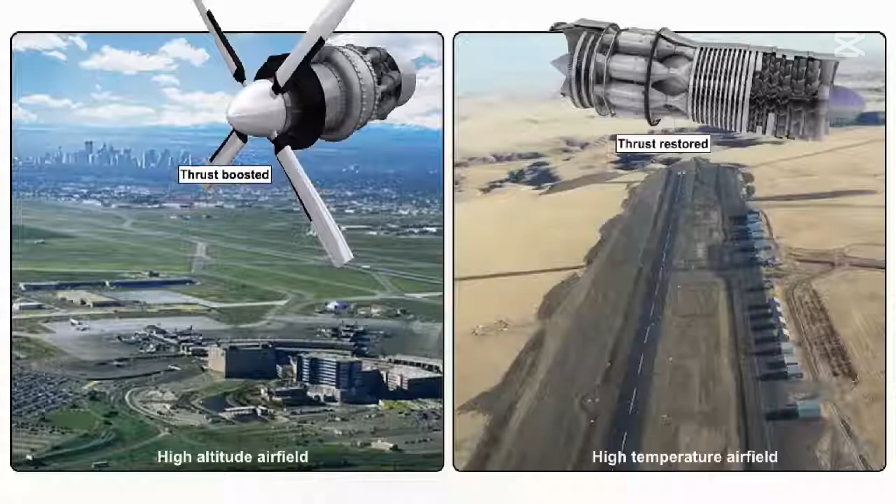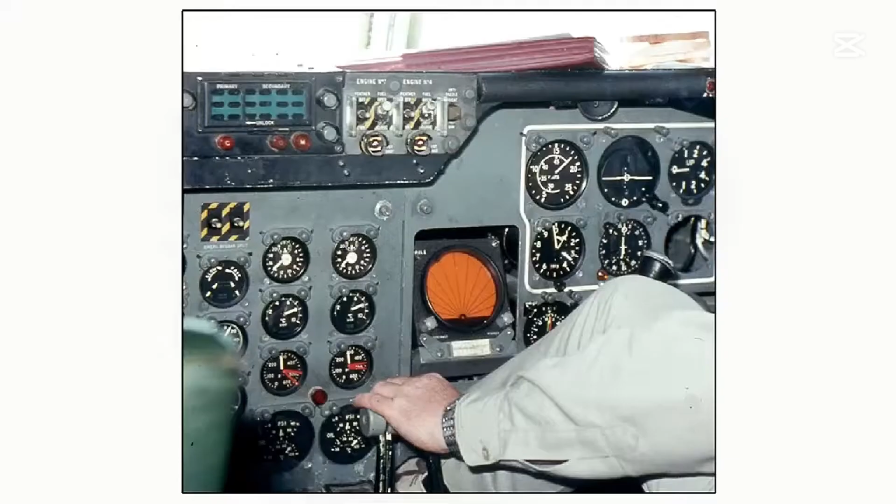In conditions of high altitude and/or high ambient temperature, the use of a water injection system can restore the thrust of a turbojet engine and boost the output of a turbopropeller engine. Typically, the water injection system is activated by moving the throttle to the takeoff position.

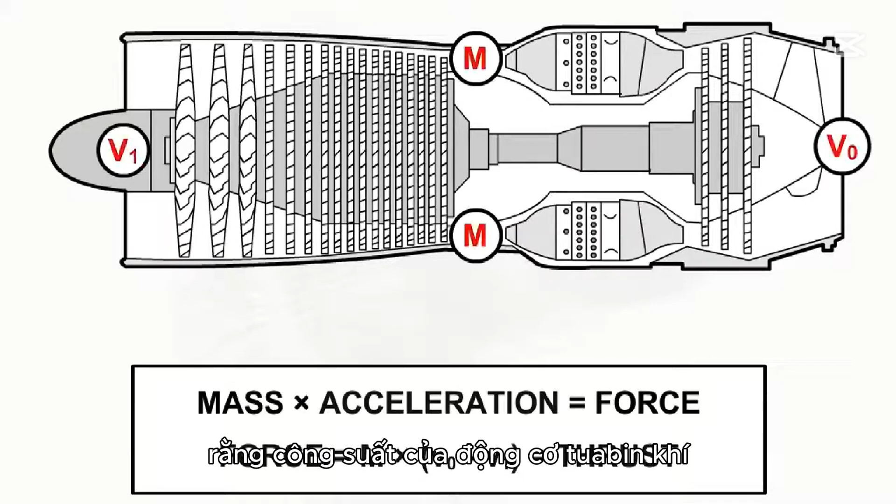We stated in the introductory lesson that the power output of a gas turbine engine depends upon the mass of air flowing through it and the acceleration imparted upon that mass of air. In conditions of high altitude and/or high ambient temperature, the density of the airflow through the engine, and therefore the mass of that airflow, decreases, causing a reduction of thrust in the case of a turbojet engine, or a reduction of shaft horsepower in the case of the turbopropeller engine.

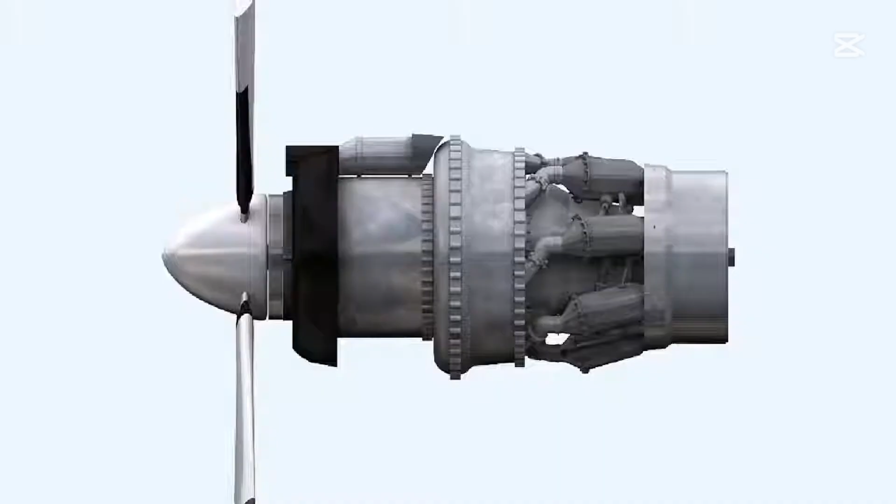To restore, or as is sometimes the case, boost the power output of an engine, the airflow passing through that engine can be cooled by spraying water into it.

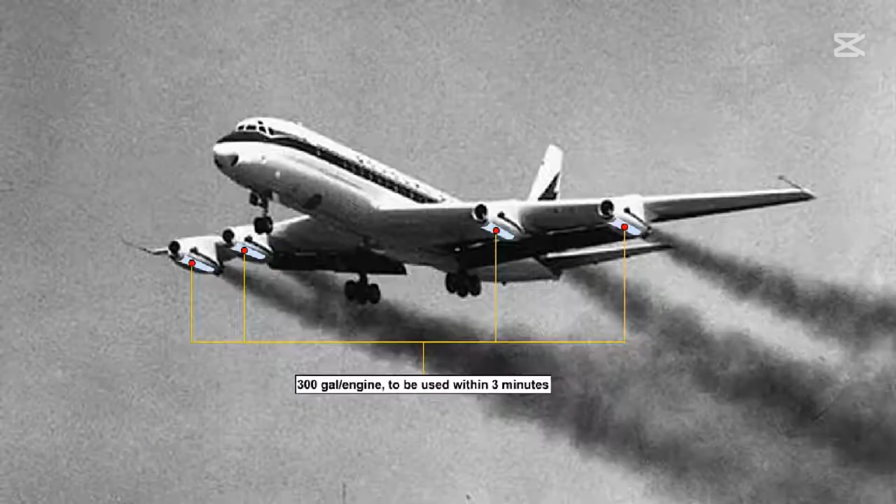The amount of water carried for use in these water injection systems can be large. The Boeing 707 and the DC-8 used to carry approximately 300 gallons of water injection fluid per engine, which had all to be used up during the 3-minute takeoff and climb. This equated to a water flow rate of 100 gallons per minute. The fuel flow through each engine at takeoff was 9,000 pounds per hour, or approximately 22 gallons per minute. This gave a water flow to fuel flow ratio of 4.5 to 1 through the engine during those periods when the water injection was being used.

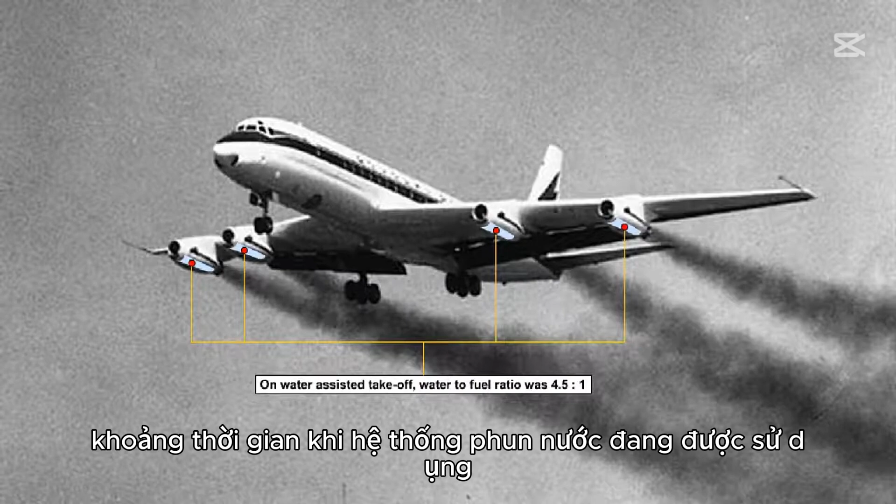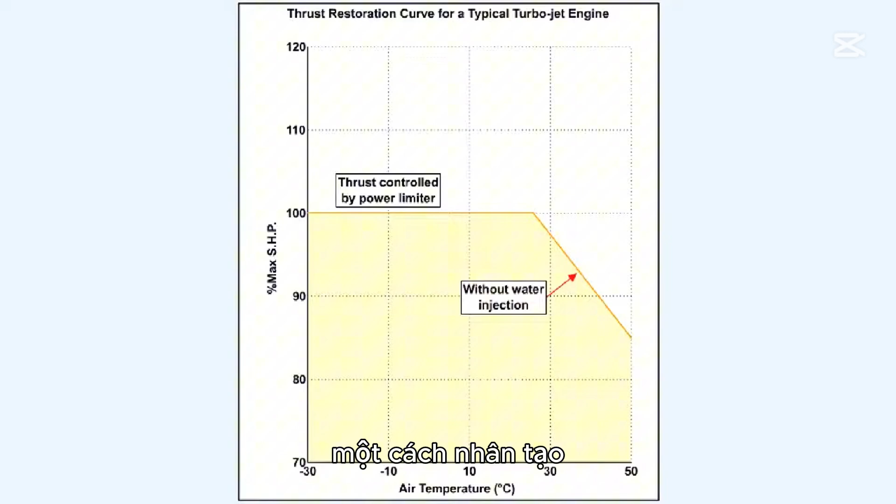This diagram shows the maximum level of power available from a typical early design turbojet engine. The power from this engine is limited artificially by a component in the fuel control system of the engine. Just how this happens need not concern us here. Notice, though, that 100% of power continues to be available even up to 25 degrees Celsius, which is ISA plus 10. At ambient temperatures higher than this, though, the power available drops off.

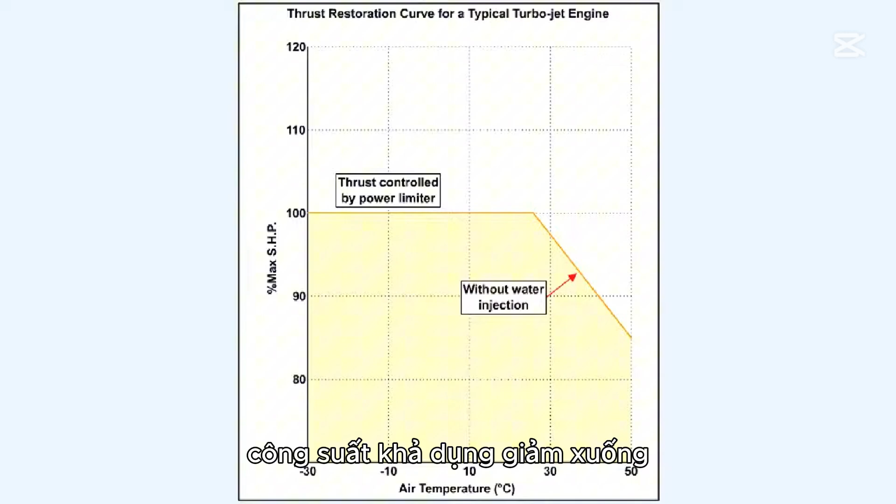Now we can see the power restoration curve for the same engine after a water injection system has been utilized to restore the power available from the engine back to the 100% level. The ability of the power restoration system is, however, limited to only perhaps 25 degrees Celsius above ISA.

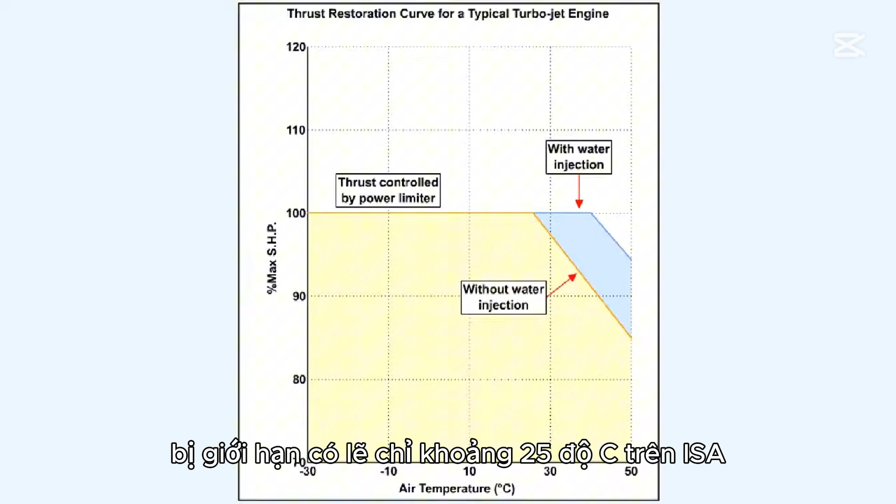The reason for limiting the thrust restoration of the turbojet engine to that of its flat-rated performance is that, although the mass of the airflow could be increased, with relatively few complications, by increasing the compressor speed, the maximum compressor outlet pressure has to be limited to prevent the engine compressor casing splitting under the excessive pressures that would be generated by using such a procedure.

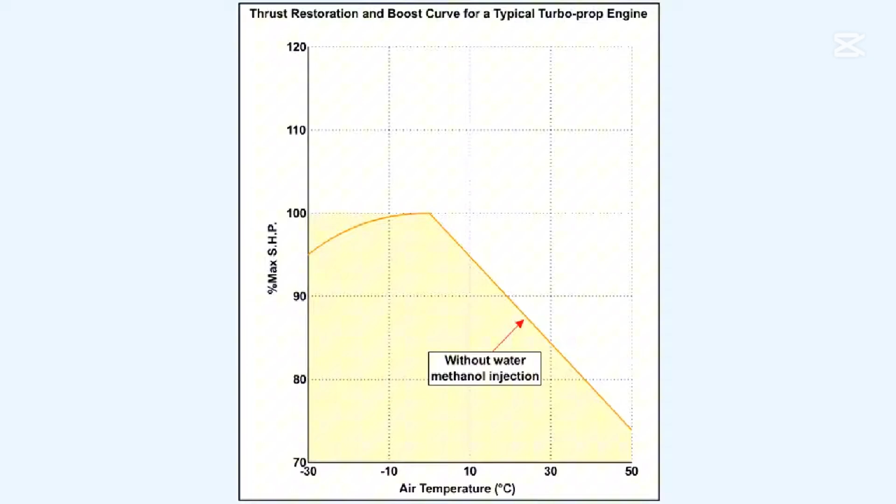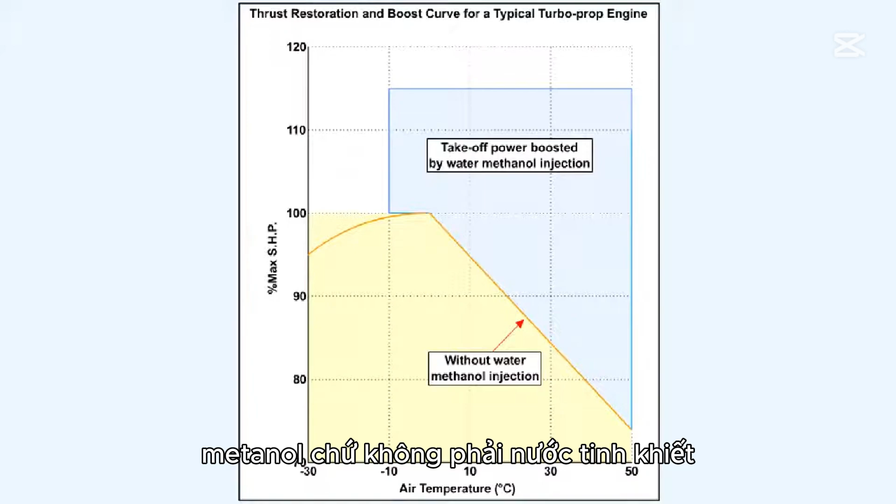This diagram shows the power curve of a typical early design turbopropeller engine without a power augmentation system operating. Now the power output of the same engine has been boosted by 15% by a power augmentation system. Note that in this particular instance the power augmentation uses water methanol as opposed to pure water. More on this fluid later.

In the case of a turbopropeller engine, if the water is injected into the combustion chamber, which is by far the most popular method of water injection, the mass flow through the turbine is increased relative to that flowing through the compressor.

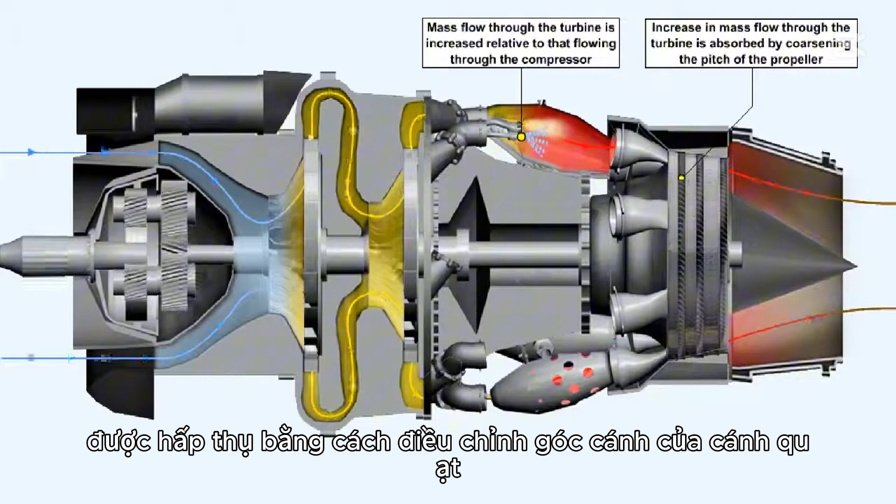In the turbopropeller engine, this increase in the mass flow through the turbine is not used to increase the compressor RPM, and thereby increase compressor output pressure. Instead, the increase in mass flow through the turbine is absorbed by coarsening the pitch of the propeller to increase the mass of air being thrust rearwards, while maintaining the engine rotational speed at no more than the normal maximum. This procedure very effectively increases the shaft horsepower output of the engine.

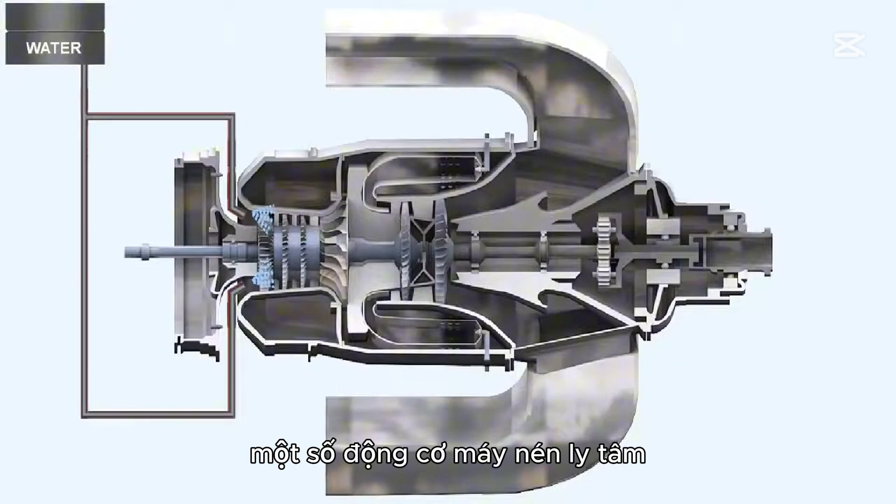Some centrifugal compressor engines, and also some small American-designed axial flow compressor engines, used a system of injecting the water into the engine intake. Unfortunately, the water distribution was not of the best, and also the quantity of water injected had to be limited, so as not to cause an engine flameout.

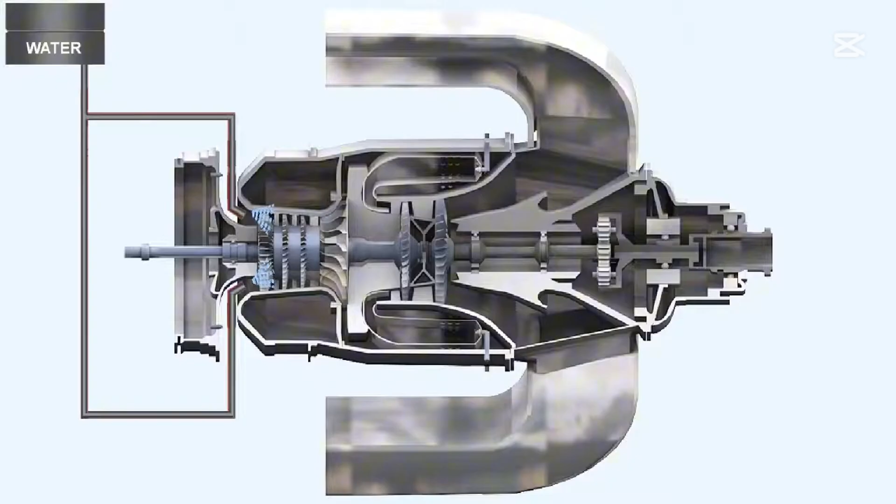As we stated earlier, injection of water into the combustion chamber increases the mass flow through the turbine relative to that through the compressor. Because a comparatively lower level of energy is being extracted from the turbine, even though there is an increased mass flow through it, there is a related decrease in the amount of pressure and temperature dropped across the turbine.

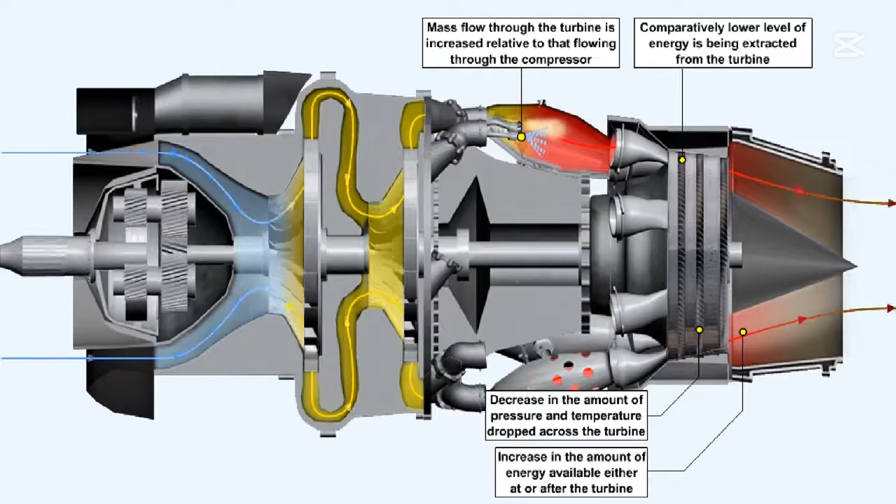This means that there is an increase in the amount of energy available either at or after the turbine. This can be used to generate extra thrust, either by driving the propeller at a coarser pitch, in the case of a turbopropeller engine, or, in the case of a turbojet engine, by increasing the pressure at the propelling nozzle.

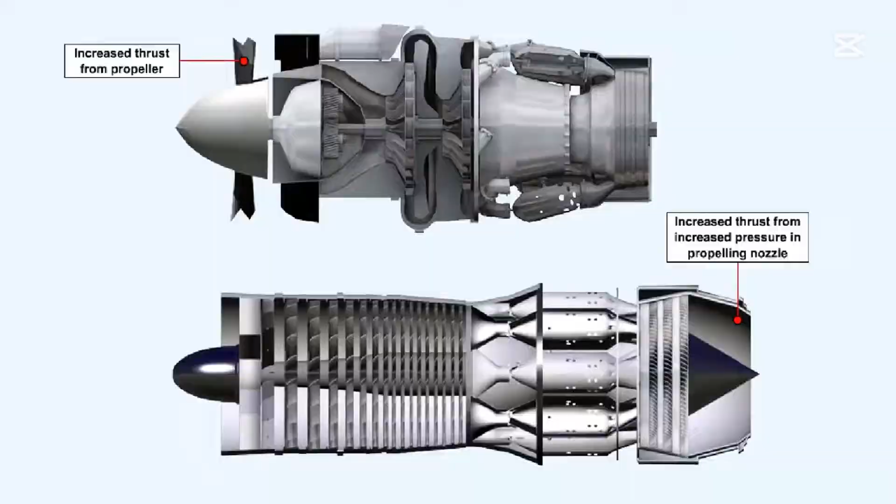A pure water injection system does have some drawbacks, not least because the water must all be used up on takeoff if it is not to freeze in the tanks as the aircraft climbs to altitude.

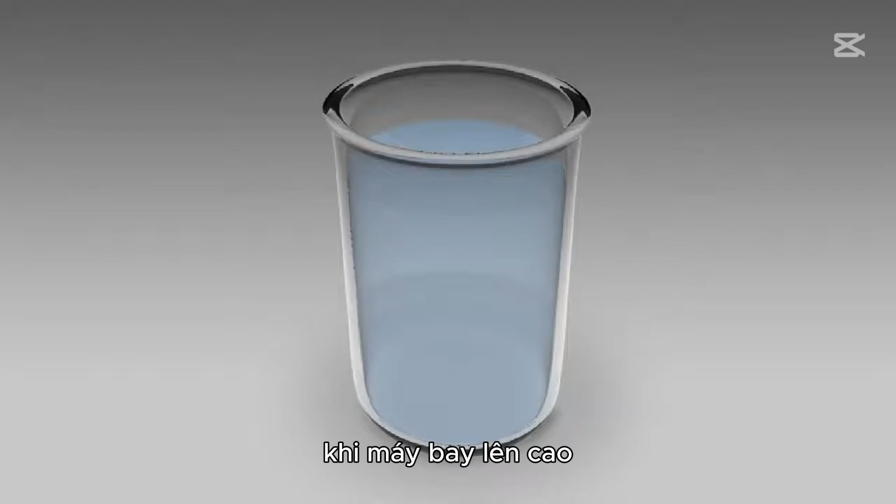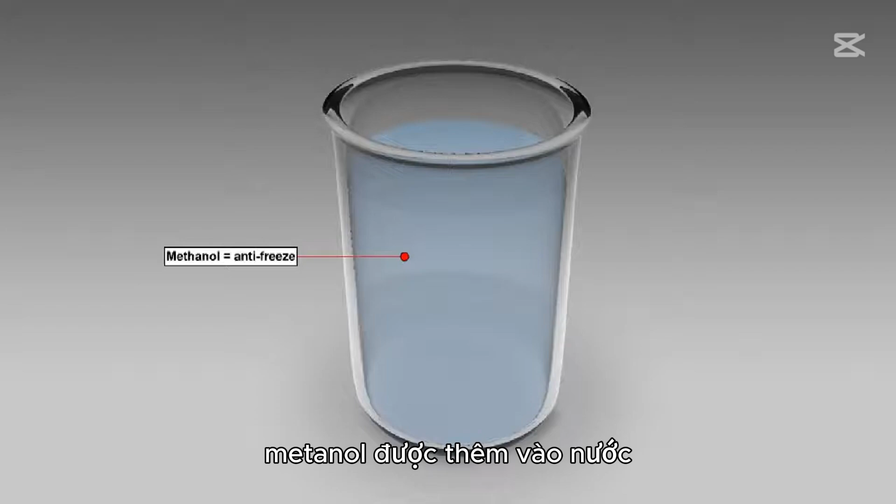It's logical to require an injection fluid that does not freeze. Thus, methanol is added to the water. The methanol serves primarily as an antifreeze.

By injecting coolant into the combustion chamber, the turbine gas temperature is lowered dramatically. However, if nothing was done to counter this fact, it would lower the amount of power potentially available, because the turbojet is a heat engine, which relies on there being a large temperature drop across its turbine.

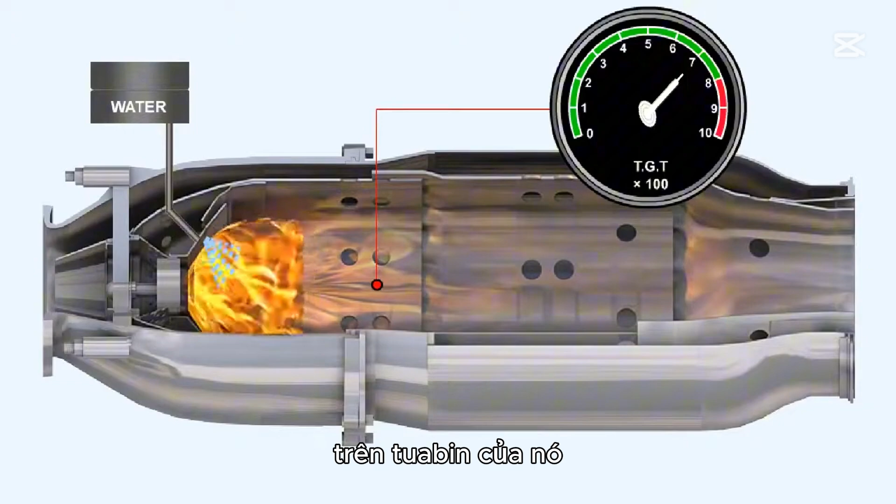The bonus obtained by using methanol is that, because it is an alcohol fuel, it burns, and thus adds to the temperature of the gases, raising the turbine gas temperature back to its original level.

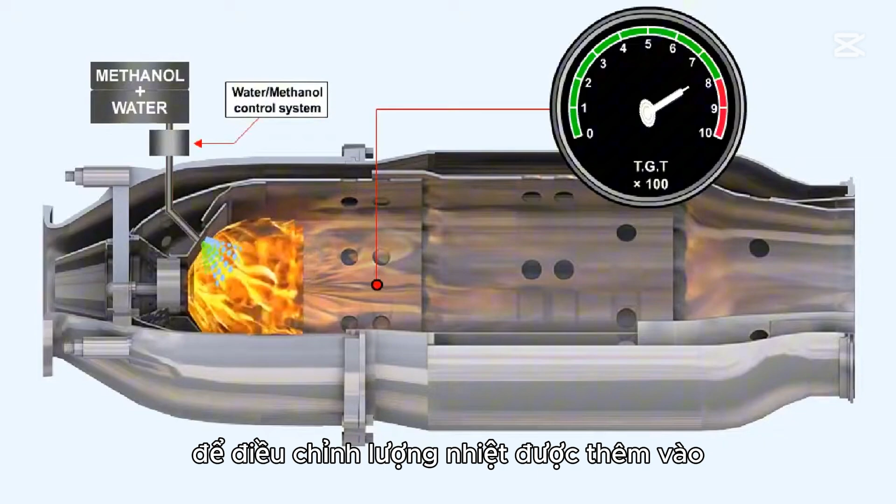In order to regulate the amount of heat added, the quantity of water methanol injected into the engine must be carefully regulated. This is accomplished by a water methanol control system.

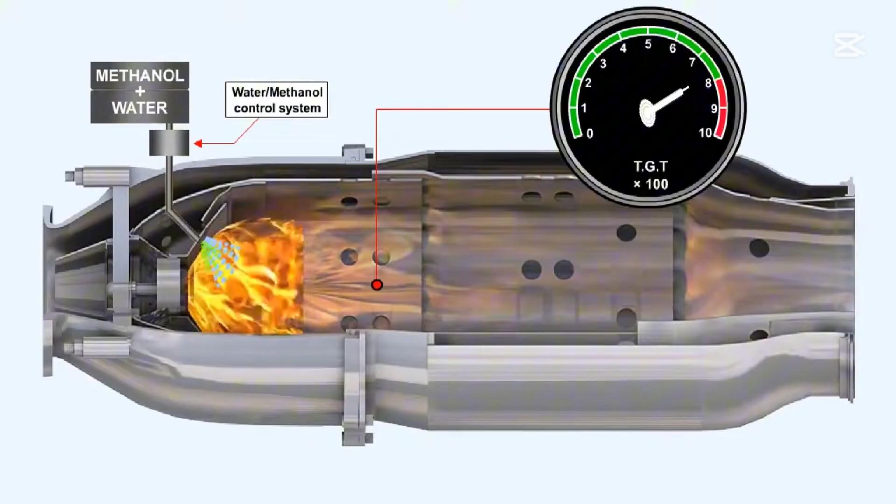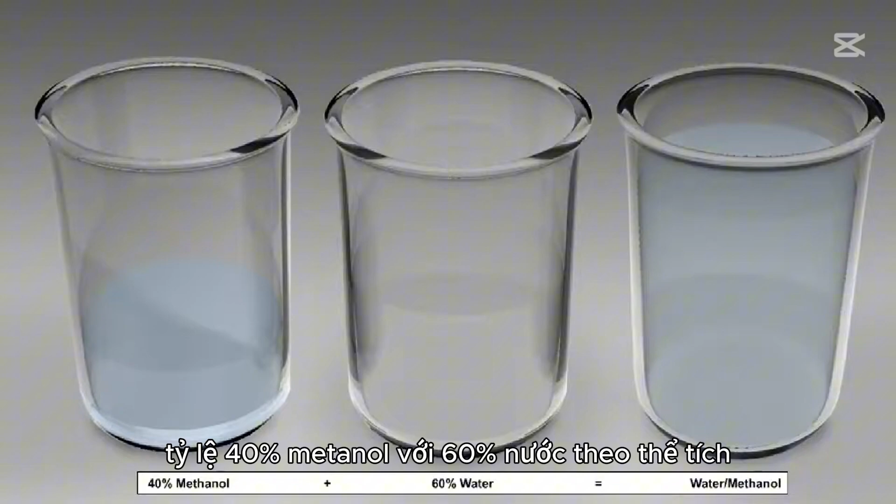The proportion of methanol added to the water must also be carefully controlled. A ratio of 40% methanol to 60% water by volume ensures that the turbine gas temperature limits should never be exceeded during use of the water methanol system.

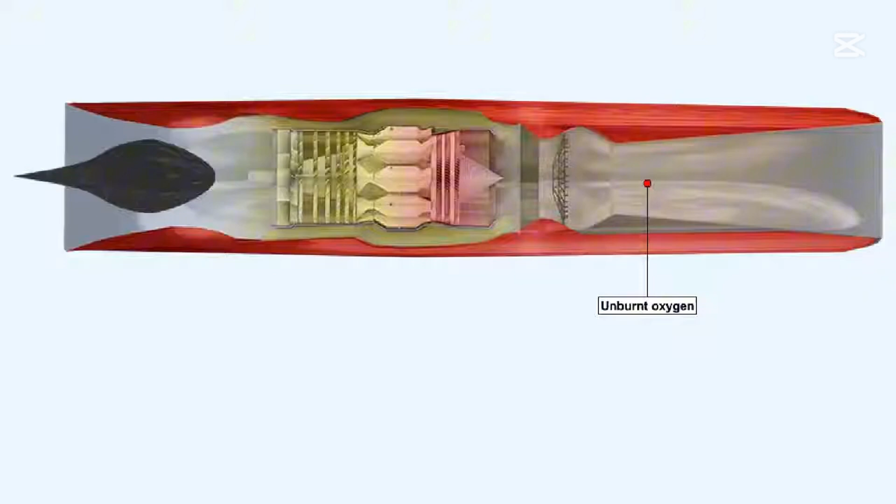Thrust augmentation by afterburning, or as it's sometimes called reheat, makes use of the unburnt oxygen which remains in the engine exhaust gases to release more heat energy.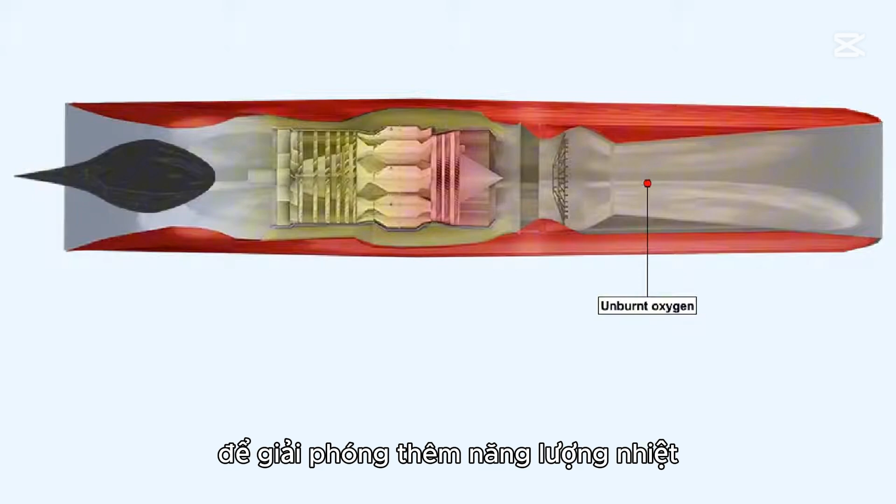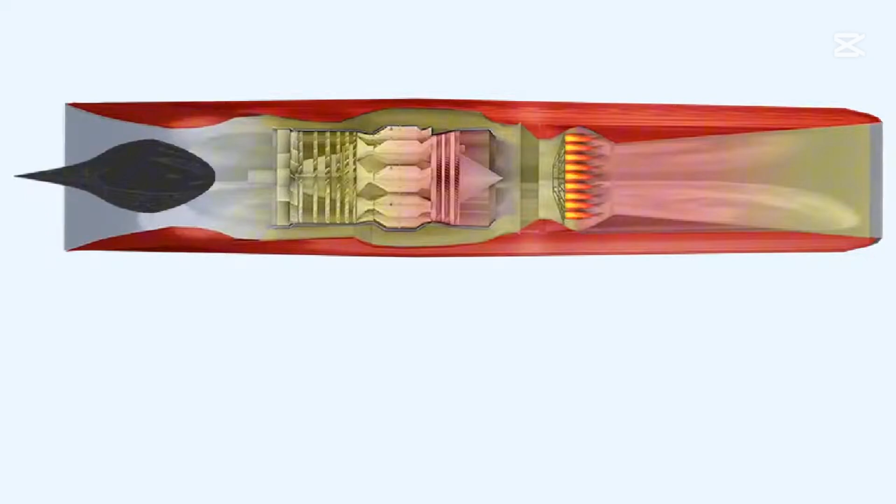This is achieved by injecting fuel somewhere between the turbine and the propelling nozzle and burning it. Afterburning is used to improve takeoff, climb and combat performance. Its use is mainly restricted to military aircraft.

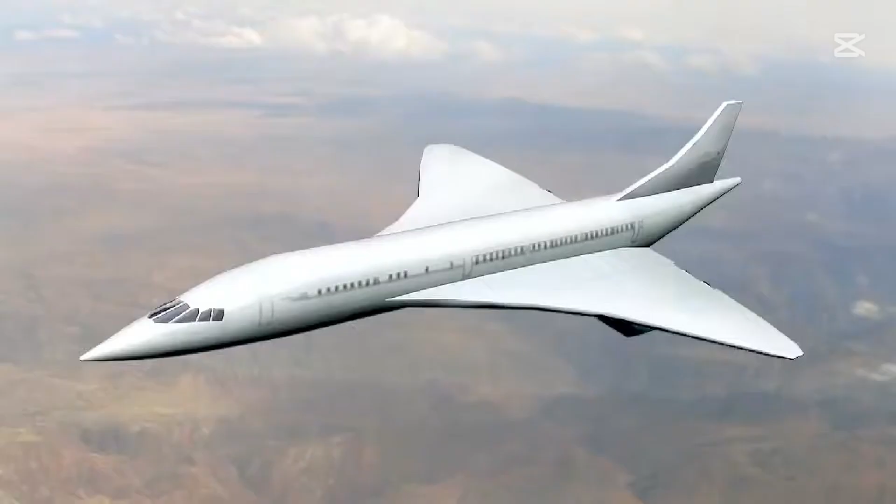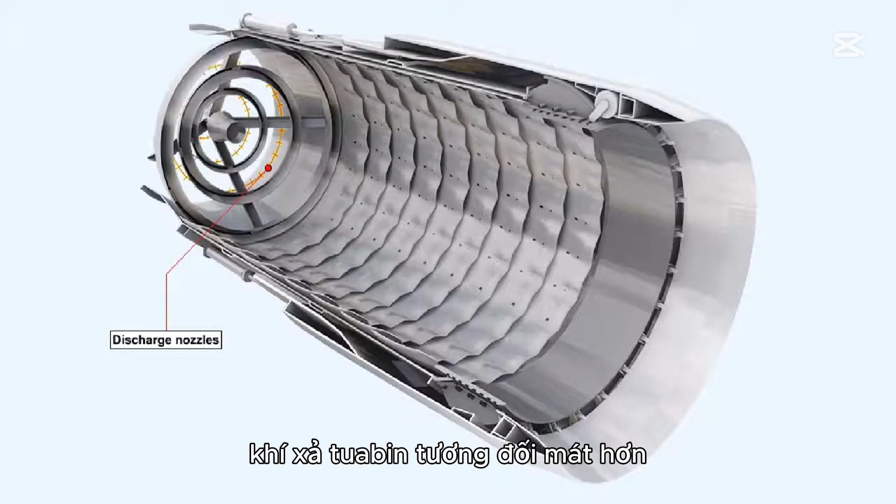Fuel is introduced into the jet pipe through discharge nozzles centrally disposed around the axis of flow. This enables some of the relatively cooler turbine discharge gas to flow along the jet pipe walls, which aids in cooling the jet pipe. This is required because the afterburner flame temperature may be in excess of 1700 degrees Celsius.

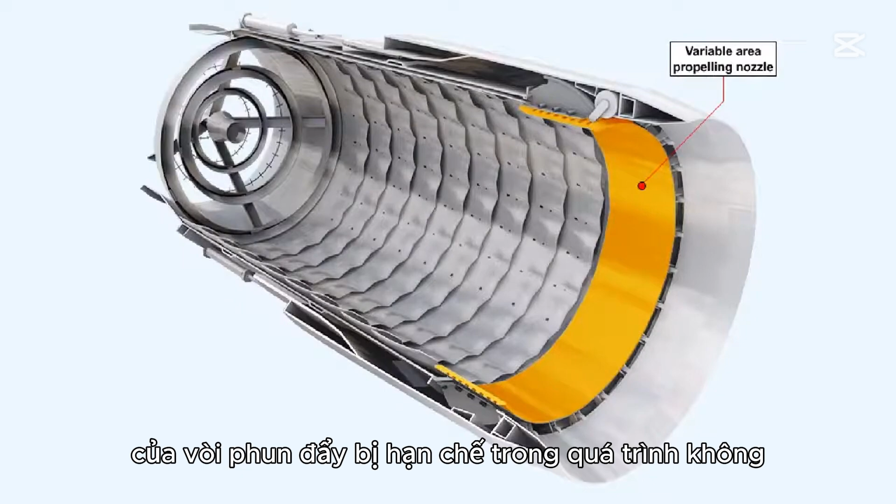An afterburning jet pipe is fitted with a variable area propelling nozzle. The area of the propelling nozzle is restricted during non-afterburning operation, and it's opened fully to allow for the increased volume of gas which is produced during afterburning operation.

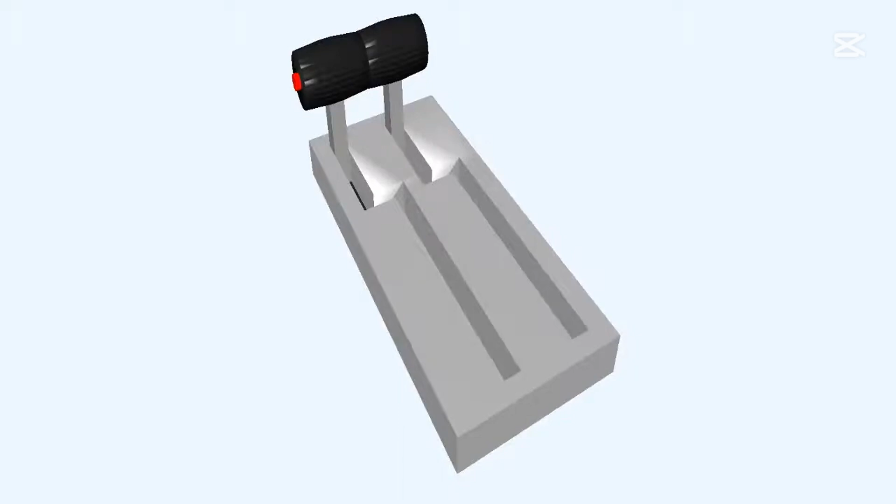The selection of afterburner is usually initiated by the pilot moving the throttle lever through a detent or gate. Control of the nozzle is automatic.

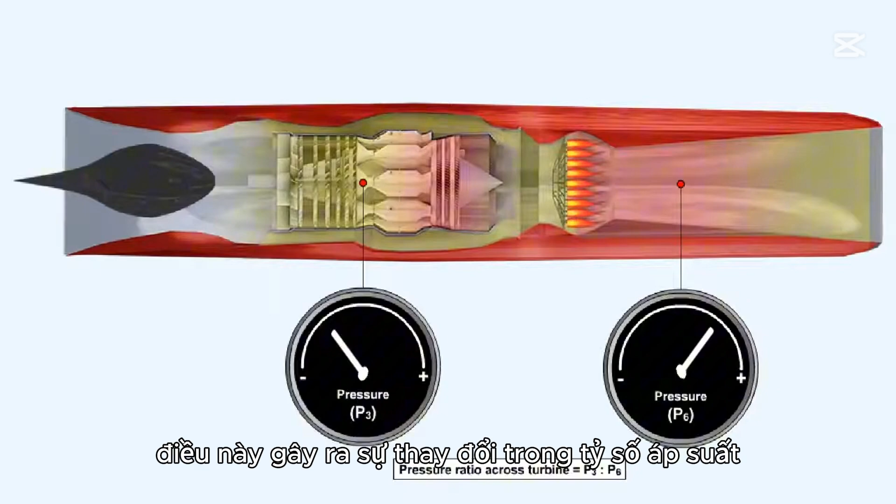When the fuel from the afterburner is ignited, the pressure in the jet pipe, which is called P6 pressure, will increase. This causes a change in the pressure ratio across the turbine. The pressure before the turbine is commonly called P3 pressure, so the pressure ratio across the turbine is P3 to P6.

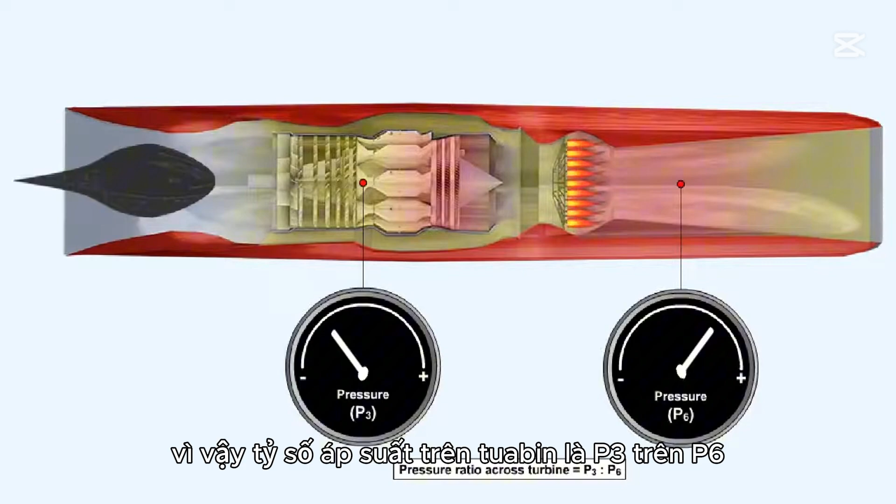The variable area propelling nozzle is automatically opened so as to restore the correct P3-P6 ratio.

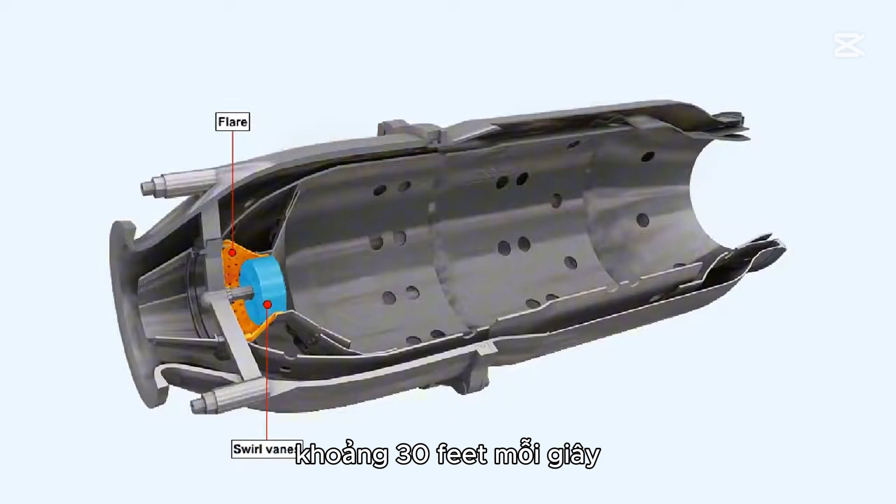In the combustion chambers lesson, we stated that because the flame rate of kerosene is only approximately 30 feet per second, to prevent the flame in the chamber being extinguished immediately, we had to slow down the speed of the air entering the combustion chamber. In the combustion chamber we used components called the flare and swirl vanes to effect that reduction in velocity.

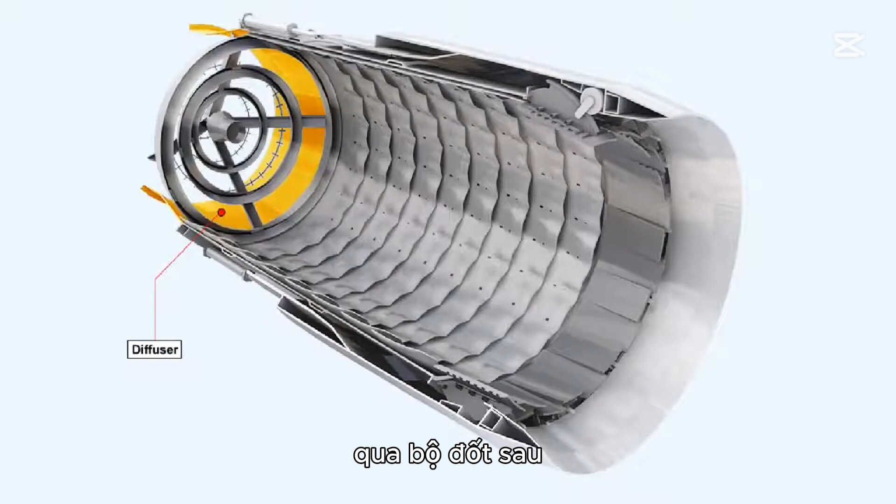Because of this low flame rate, we must also reduce the velocity of the gas stream through the afterburner, in order that the afterburner flame can remain stable. This is achieved by a diffuser, which is positioned before the afterburner section.

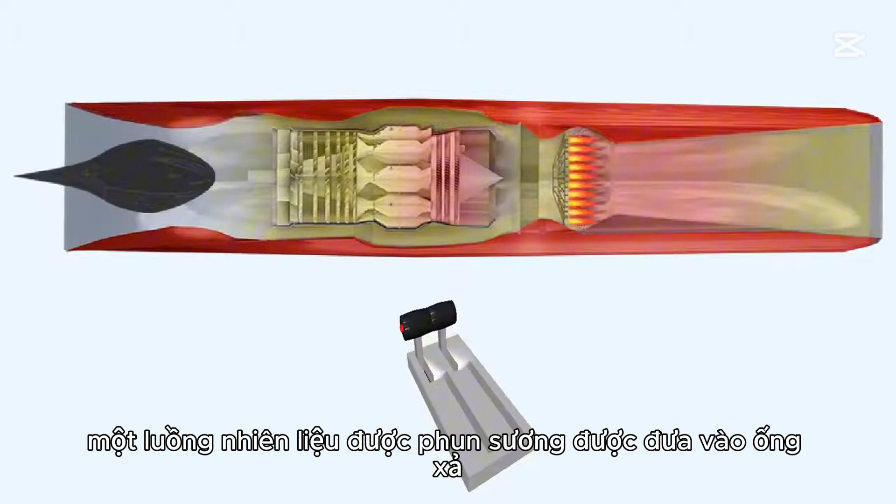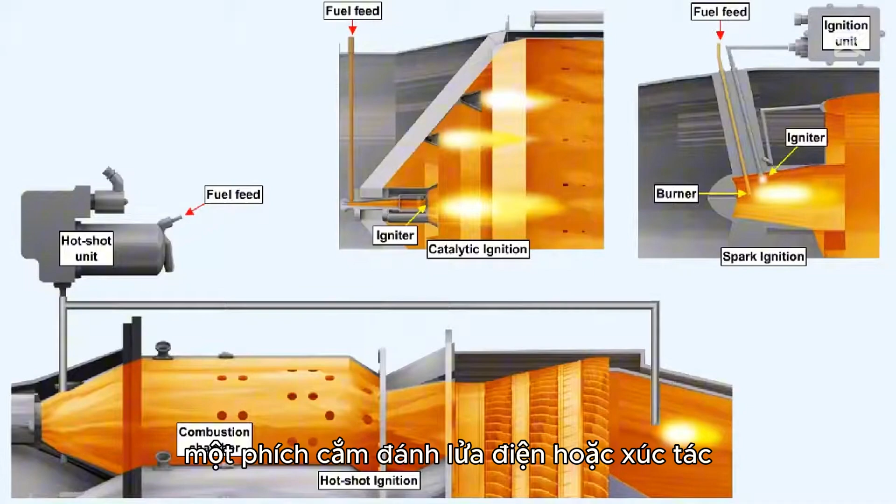When the afterburner is selected, an atomized fuel spray is introduced into the jet pipe through the burners. The atomized fuel spray is ignited by either an electric or catalytic igniter plug, or, in some systems, hot shot ignition.

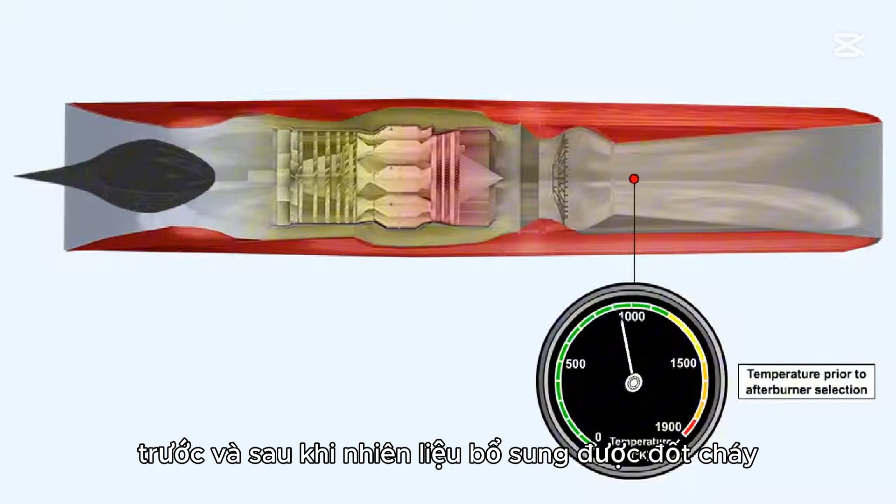Once combustion is established, the gas temperature increases appreciably. The increase in thrust obtained due to the use of an afterburner depends entirely upon the ratio of the absolute jet pipe temperatures before and after the extra fuel is burnt.

If, for instance, we assume a gas stream temperature of 900 degrees Kelvin prior to selection of afterburner, and the temperature of the gas stream rises to 1500 degrees Kelvin subsequent to its selection, then the temperature ratio is obtained by dividing 1500 by 900. This gives us a temperature ratio of 1.666.

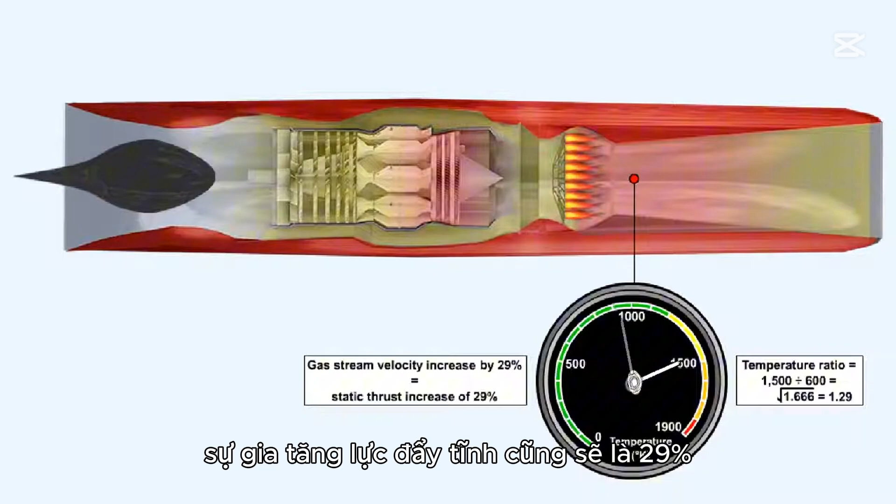The velocity of the gas stream in the jet pipe increases as the square root of the temperature ratio. In our case, that is the square root of 1.666, or 1.29. This means that the gas stream velocity will have increased by 29%, and thus the increase in static thrust will also be 29%.

As can be imagined, the fuel consumption goes up dramatically when the afterburner is selected, so its use is normally limited to short periods only. This concludes the lesson on thrust augmentation.